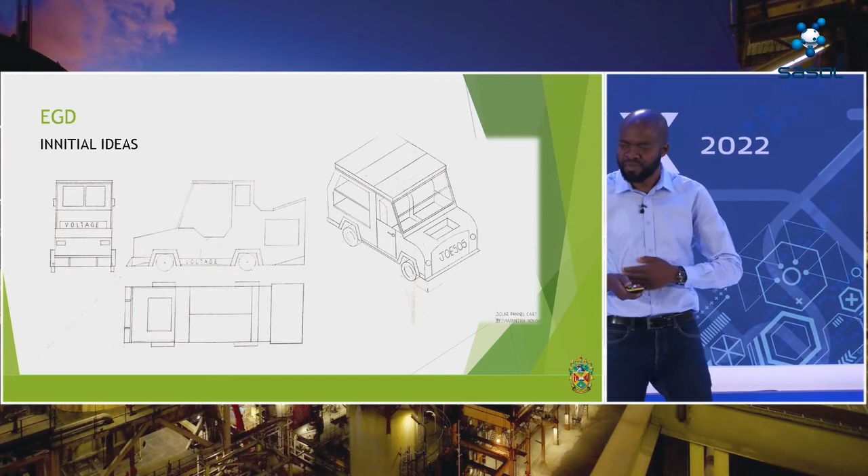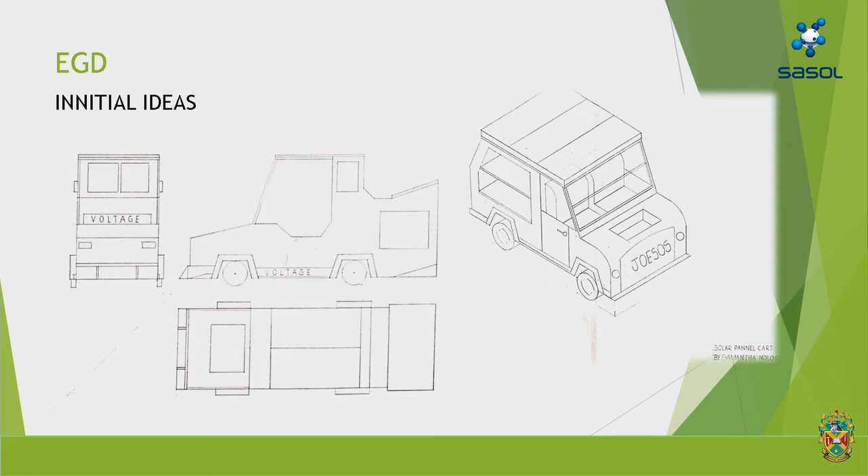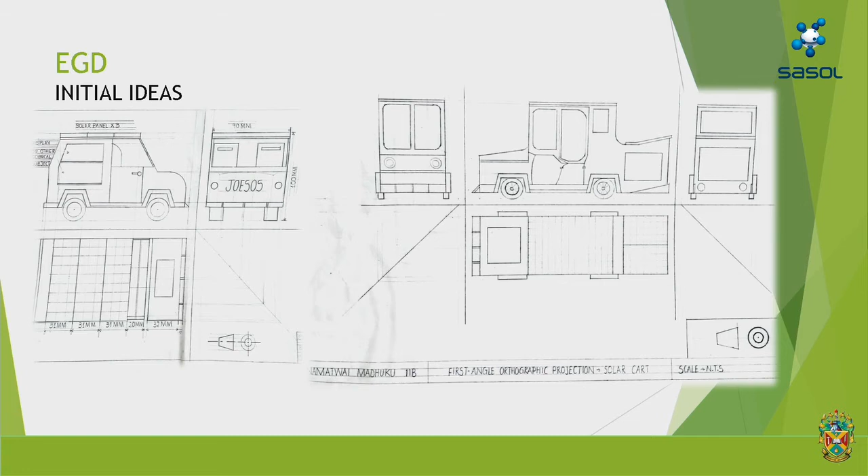We started there. You will see different initial ideas of the car designed by students before we started building. Learners were excited with this project, and we went from different ideas to select what we think is the best one. The car we opted for was the one on the far right-hand side, because it would allow panels to be placed above the car to attract enough sun so the car could move with solar power generated. There is the 3-dimensional isometric drawing of the car, and it started there.

It's important that learners understand the importance of technical drawing, or what we call engineering graphics and design, because before you design something, if you cannot visualize it and see it on paper, it is difficult to work on it. So from this drawing, it was very easy to start building this particular car.

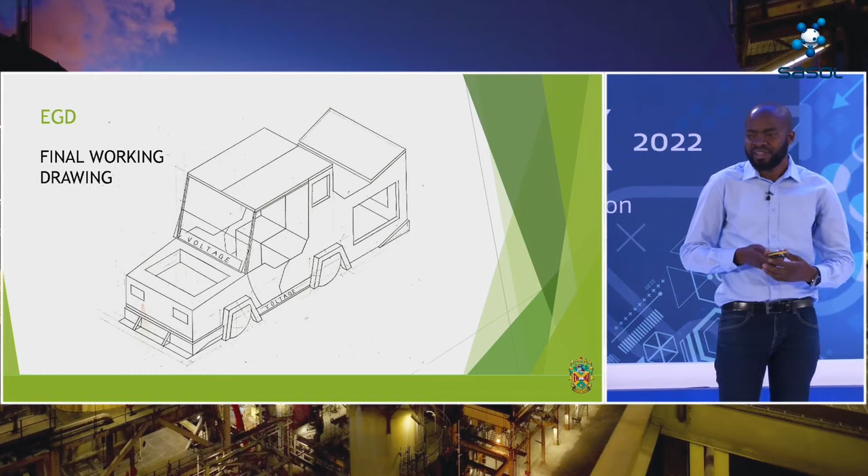You can see 3 panels on top of the roof of the car, one at the back and two at the top, each one generating 100 watts. So this car can actually produce 300 watts of energy.

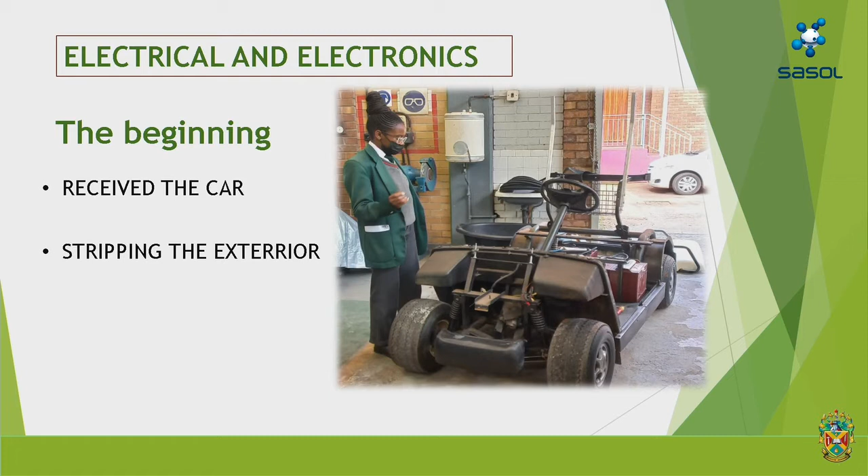Where we started, we acquired an old golf cart that was not working, and we bought this and stripped it completely. Learners from automotive mechanical technology at the school were given the task to strip the car and rebuild it to make it work. So that's where we started, and you can see the car in our workshop there.

From there, we moved to another subject - automotive learners fixed the car so it could work. We then went to another subject within mechanical engineering, welding. The car needed to have a structure, so welders were responsible for the whole frame structure of the car. That's how we were integrating and collaborating our subjects.

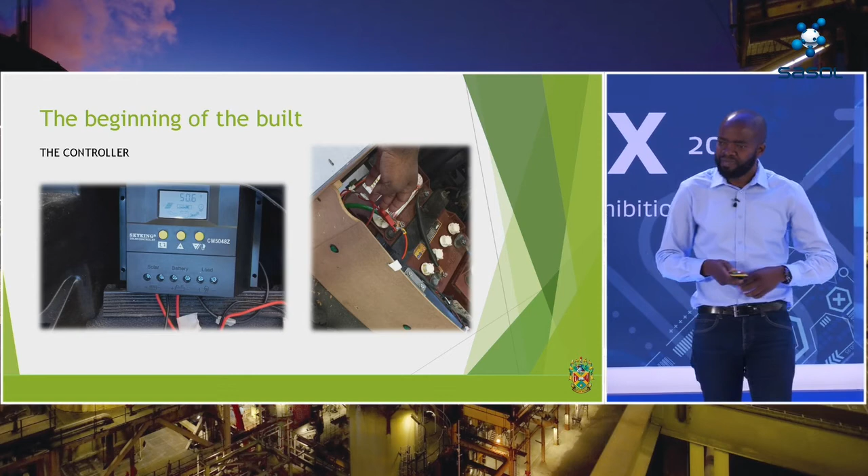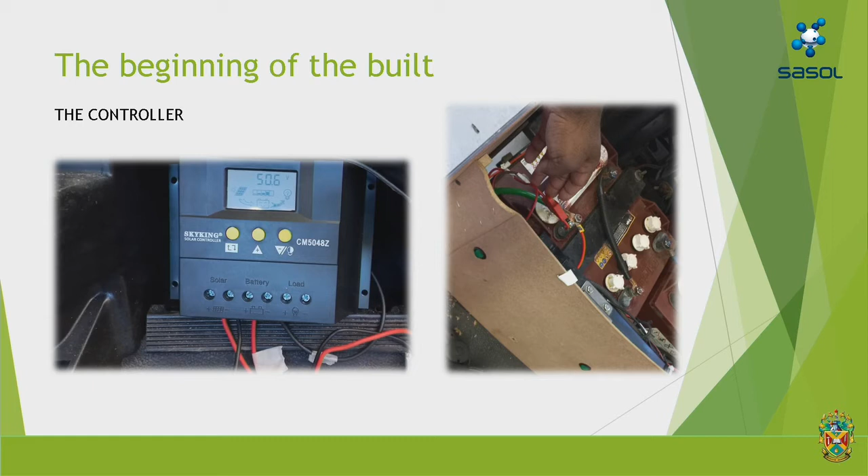Electrical learners - we acquired all the components they needed. You will see batteries there, and some controllers. Learners doing digital and power systems in electricity were responsible for this task, to make this car function. Their role was to make sure the car could work, that we could control it, and that it could perform basic functions.

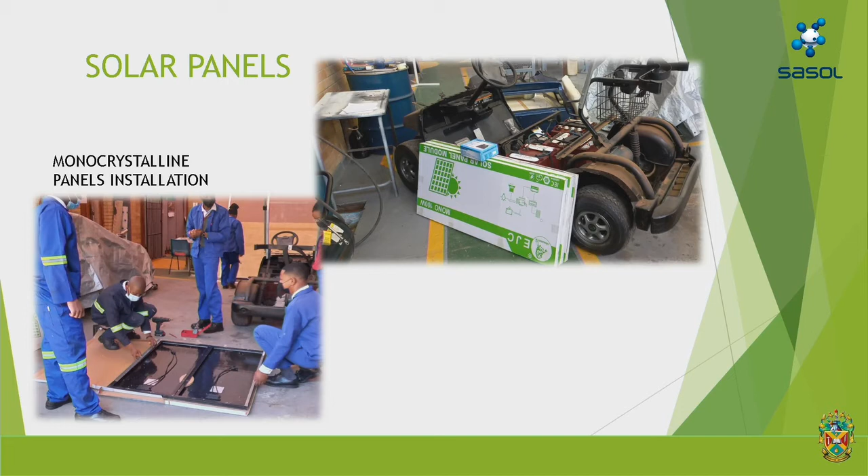And there are our panels. Fortunately, we are in partnership with Sasol. We requested funding for panels, and Sasol sponsored us with the panels. You can see learners working on the panels, rearranging them, and then the car was starting to take shape.

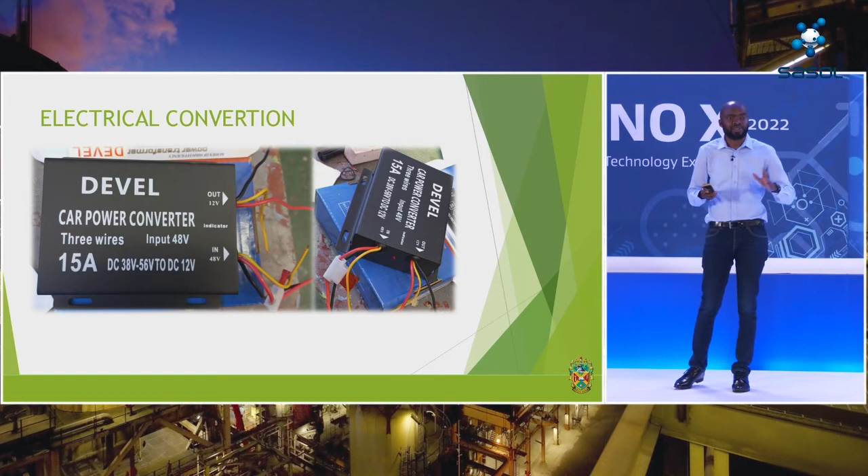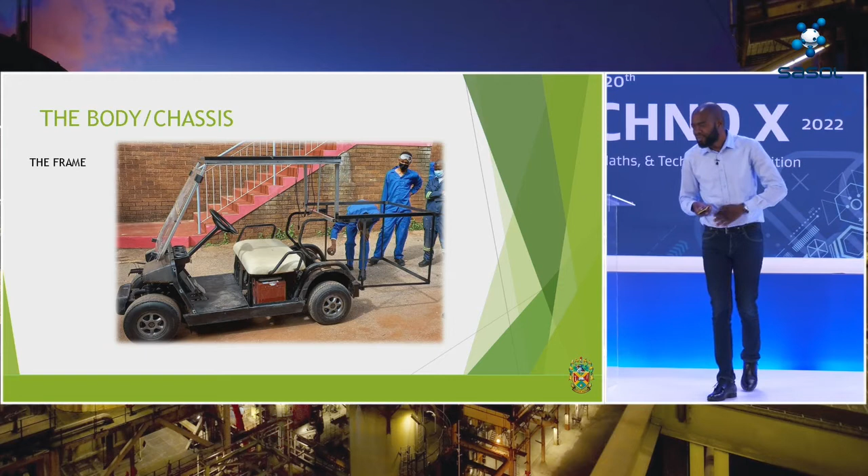After that we chose woodworking. We also have woodworking at the school, which is civil technology. We decided to purposefully use wood as the external part of the car for the body. Wood is very special - it's one of the renewable materials that we can use. We gave woodworking learners specs according to the drawings.

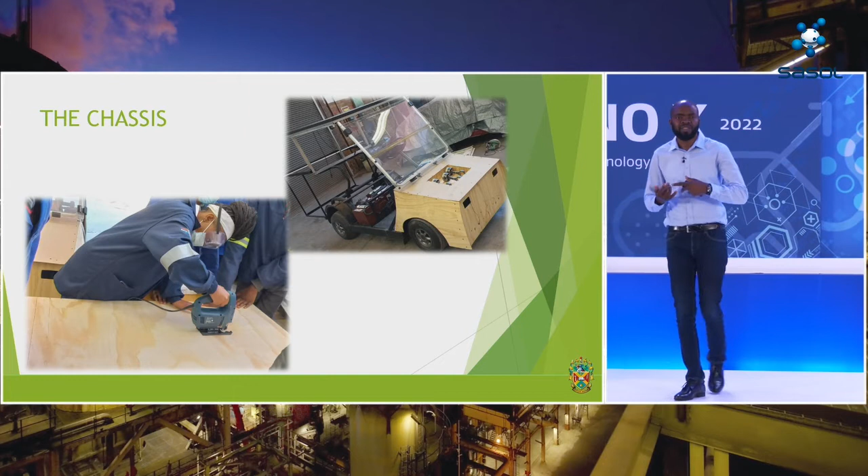Be mindful that all these components are being created from totally different workshops from where the car is. So the concept of understanding precision and measuring, which is an important aspect of mathematics, plays a very important role in this whole concept. So there are woodworking learners cutting the body parts of the car and beginning with the assembly.

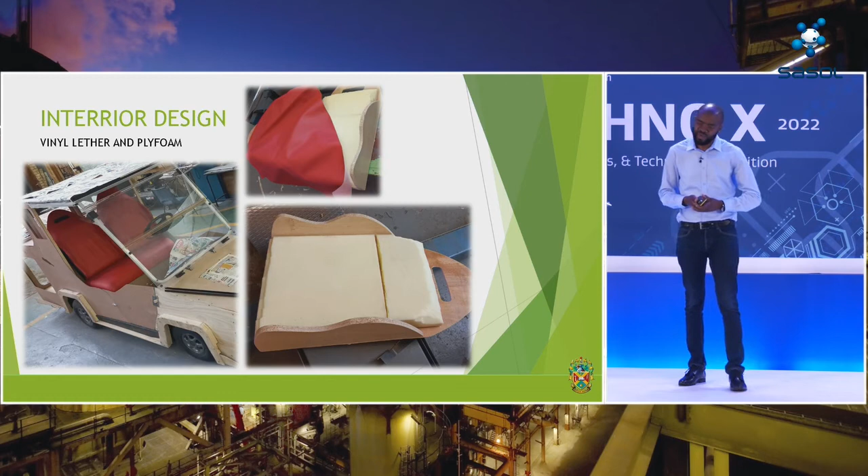And there we are. Our car was starting to take shape. It's almost now kind of complete. And yeah, we had to decide on the seats as well. We built seats. Everything was done at school using technical skills that learners are learning at school level.

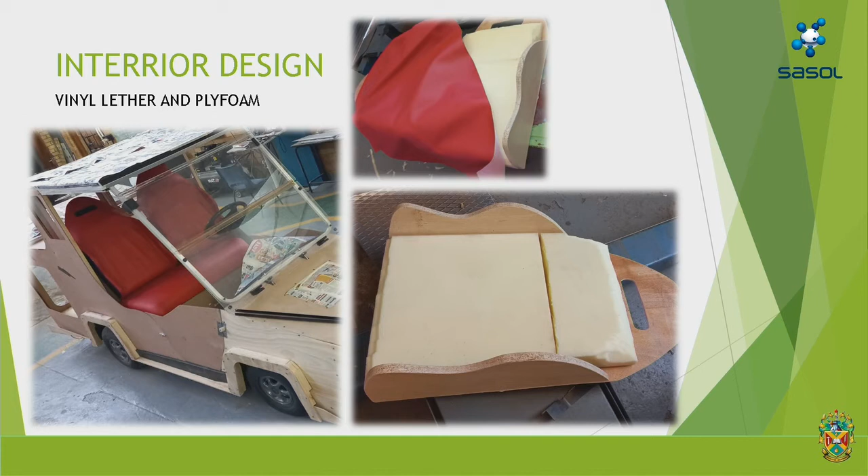We continued with the car, and the idea of the car was that it should be able to display all artifacts, models, or components of things that learners do at the school. We put them at the back so that when the car moves, it's transporting all this technology, models that learners in different aspects of our school are doing.

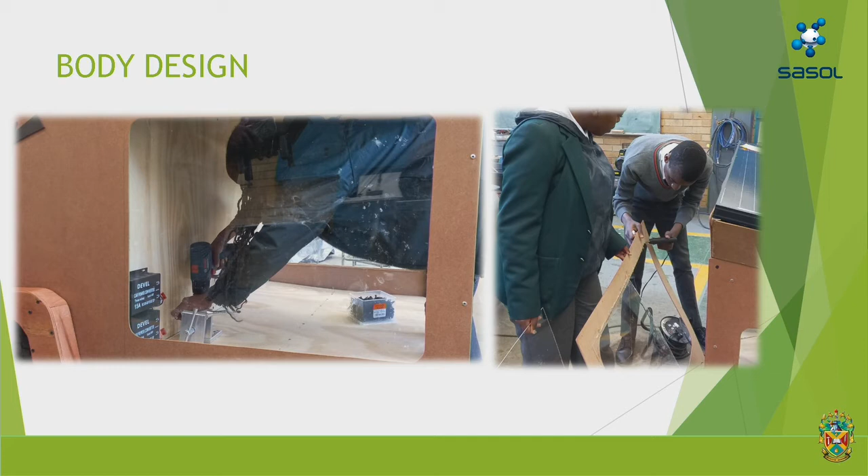And we decided to call the car Voltage, because this name was derived from the fact that this is a solar-powered car. Voltage was the name that we came up with.

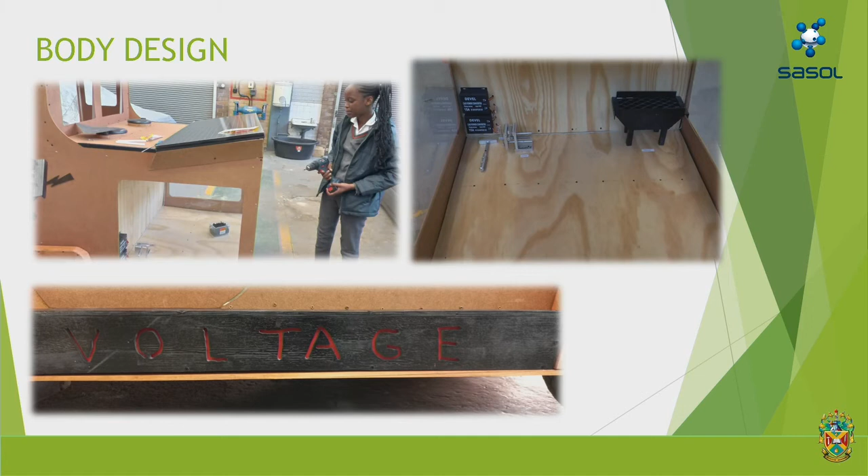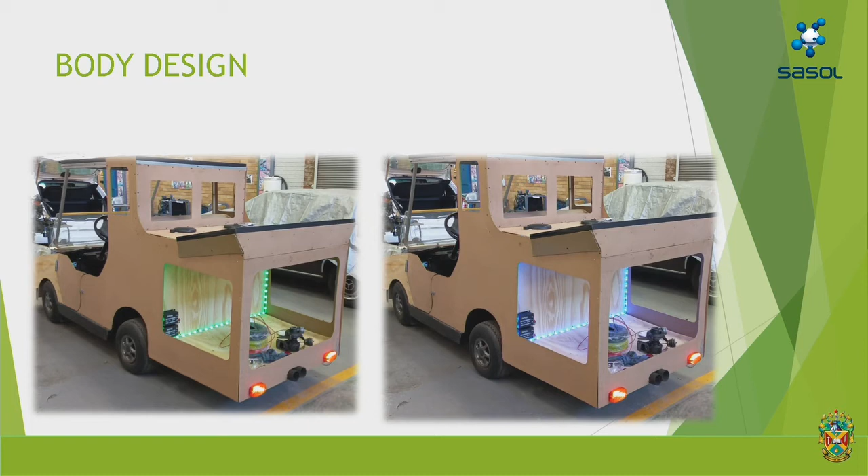There is our car, almost complete now, with some lighting at the back. You can see there's a perspex glass, you can see through if there are some items displayed in the car. And this is basically how our car came about.

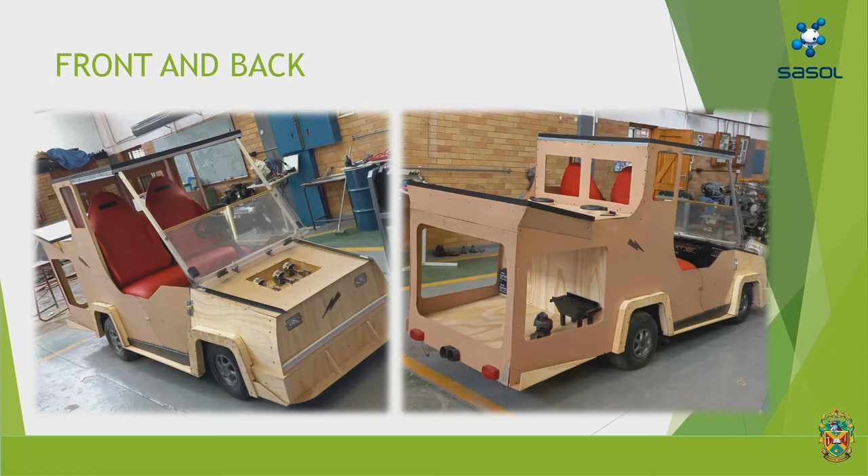There is our car. It's now ready. It was tested, everything was working. After that, we covered all the panels so that we can spray paint the car and give it a good aesthetic look.

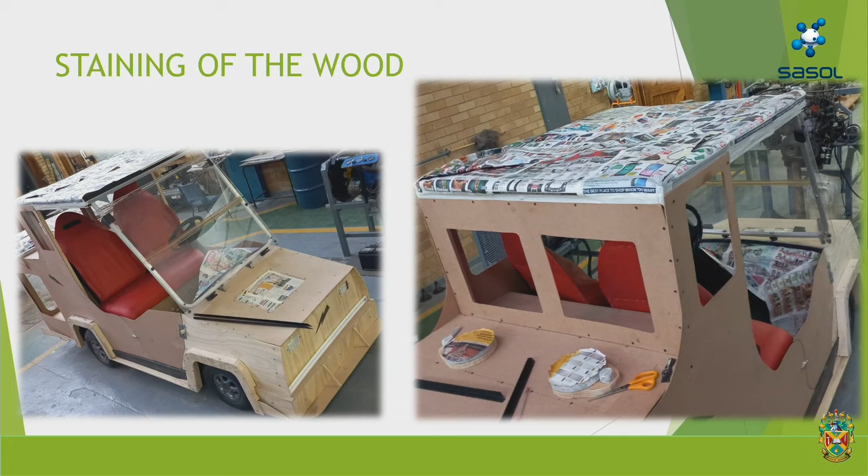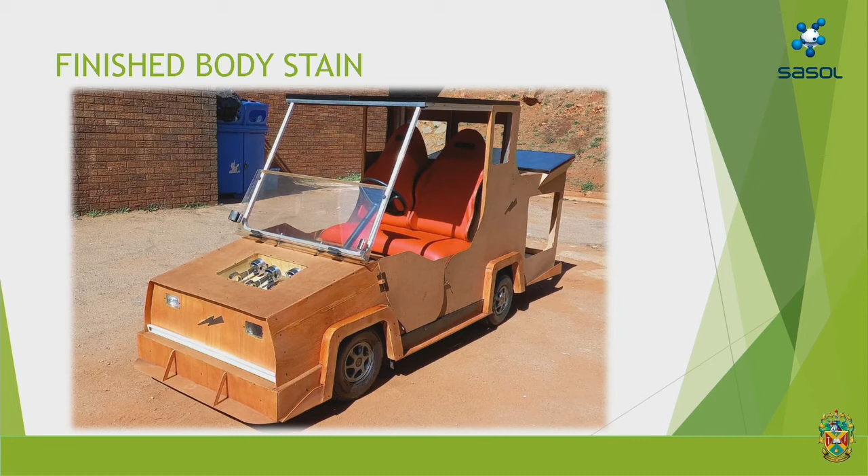And all went well. Wow, there we are. So there is our complete car. But you can see that this started from drawing, from drawing, distributed work in collaboration with different learning areas of STEM at the school, up to where this car is. So the car was completed and it was ready for the launch.

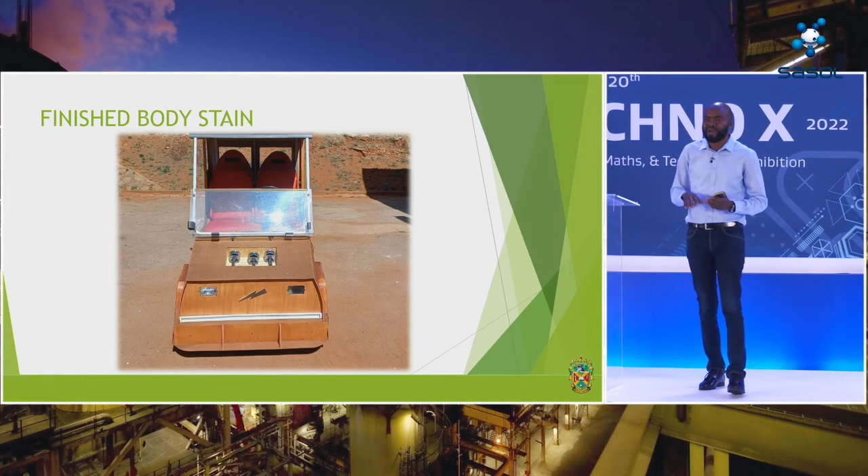So the idea was that when we are relaunched as a school of specialization, this car was going to drive the MEC. We were a bit worried, nervous about it because we didn't know whether the MEC would be transported properly, or whether the car would get stuck on the way. But we did a couple of tests and we were ready for it. And yeah, the car was ready.

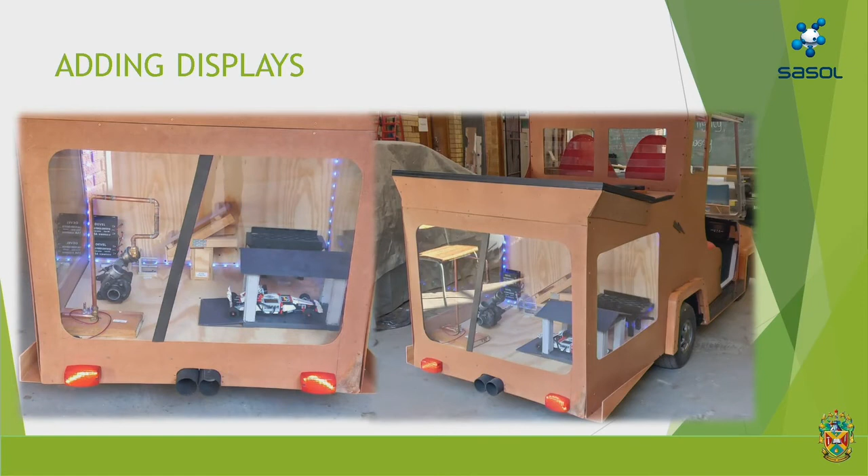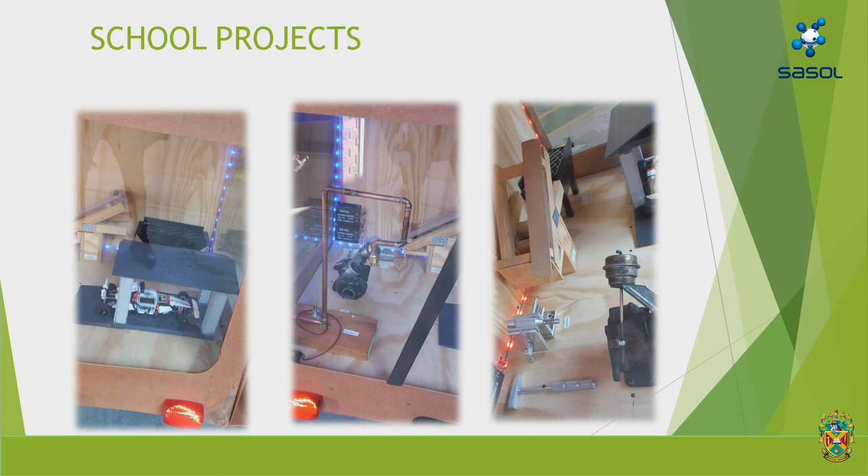You can see now at the back, we decided to take all components that were made by different workshops and display them at the car. Then the car was ready for the launch. Just another clearer view of what we had inside. So in there, we've got plumbing equipment and plumbing projects, fitting and turning projects, and stuff like that.

Okay, right. Then there we are. The car was ready for the launch. And this is basically what happened.

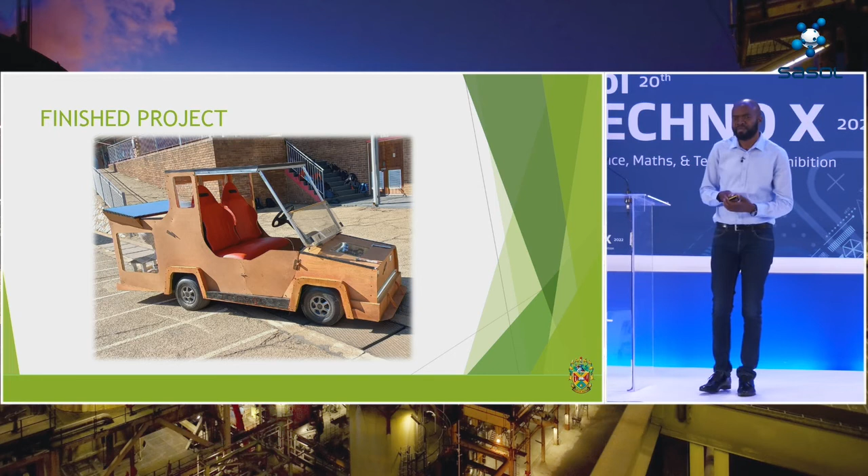So now, how the name Voltage Panya came about, it's very exciting. When the MEC was launching the car, he said, no, this car cannot be called Voltage, it must be called Panya, which is just a shorter version of his first name. We know his name is Panyaza Lesufi. And after that, we renamed the car, and the car is now known as

Voltage Panya. So in short, we just wanted to present this to you. We are very excited about this project. We believe that this is just the first part of what we need to do as the school. We have a very good plan going forward.

We are going to learn with partnerships. We are going to reach out to universities who have walked this way. And together with other partners, we believe that in the near future we have a dream of building a solar car that can be easily controlled from school, for example, to go buy McDonald's and come back. That is where we want to take this project.

Thank you very much for listening to us, and we believe that partners will come on board to support the school to take this further.

But before I leave the stage, I just want to encourage learners, especially those in technical high school, to pay so much attention to mathematics and physical science. Those two subjects are critical for you to be ready and prepared to face the future and to be relevant to future jobs. Your mathematics and science need to be in place, and those two subjects require hard work. Don't be tempted to shy away from working hard for those two subjects. They are very important. Thank you very much, learners, for listening, and all stakeholders.